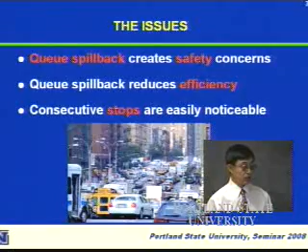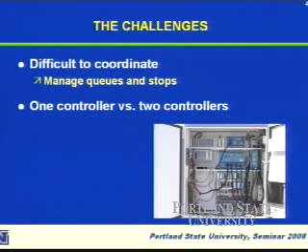Now the challenge to operate and control these signals. One thing is it's difficult to coordinate, because really we need to find ways to manage the queues, how to minimize the stops. And another issue is, we all know typically one controller will provide a much better coordination of two closely spaced signals. But there are some issues related to using one controller.

Okay, one issue, we got a lot of wiring going on. All the signal poles, signal lines, the detectors. There are a lot of wires going into this cabinet where the signal controller is located. Can the cabinet handle all those wires with two signals if we use one controller? And also, where do we find a place to place the cabinet? You need to find a place so that you can at least see both signals at the same time. So these are the challenges we are facing.

And what I'm going to talk about today is actually some special cases of closely spaced signals, where we can have certain kind of strategies to control and operate them. The first one I'm going to talk about is the interchange. And the first type, a common type interchange, is a diamond interchange, where you see the two signals. The two signals, usually, especially in the urban area, are pretty closely spaced.

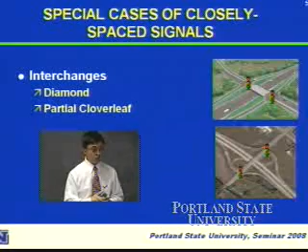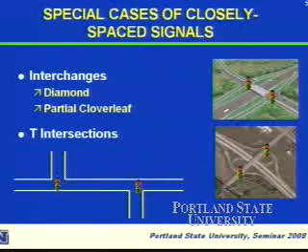And then the other type is like this. We call it the partial cloverleaf. Still, you have two signals on both sides, even though the configuration is a little bit different from the diamond interchange. So a lot of studies have been done related to diamond interchanges, but not so for partial cloverleaf interchanges. The second type, the T intersections. Probably you have seen this type of configuration a lot of places, right? You have two signals and two T-type intersections. They are closely spaced. So these are the things that I'm going to focus on for today.

I know the audience pretty much, the majority are students. So probably you have learned something, just the basics about signal timing. Anyways, I'm not going to get into the details, just quickly go over these things. To do coordination, to operate the signals together, the most important parameters are cycle length, the phase, and the offset. So you have some idea about these terms, or do you? Yeah. Actually, there's a mix of students in here. They're not all civil engineers, so maybe very quickly. Okay, then it will take a long time.

That's good. Cycle is mainly, if you try to coordinate the signals, they must have a common cycle. The cycle is from one movement going through all the other movements, how long it takes, the cycle length. The phase is for a particular movement, how much green time you are going to give to that movement. Then the offset is, when this signal turns green, how many seconds later the other signal will turn green. So just in general.

And then the type of left turn control. Mainly when we deal with the coordination, we are really dealing with left turns. How are we going to deal with the left turns? Are you familiar with the types of left turn controls? Permitted, protected, protected-permitted. Like this. Permitted, right? What does that mean? You can still make the left turn, but you have to watch the opposing traffic. So that's what it means.

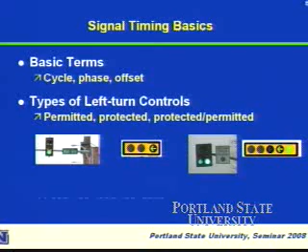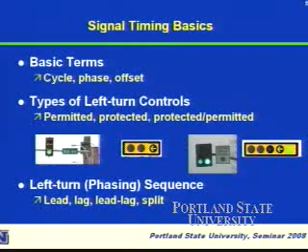But FHWA actually spent several years, close to $1 million, just to standardize the display of a protected-permitted left turn control. So those are the three common types of left turn control. And then the other one is the phasing sequence. Should we run the left turn first, then the through, or the through first and then the left turn? These different phasing sequences are all important for coordinated signals.

And next I'm going to introduce the signal phase. Again, I think you all have some kind of idea, but I still want to go over this material since I'm going to talk about the phases. Signal phases and traffic movements are related, but they are not the same thing. This is a typical full intersection where we have 12 traffic movements.

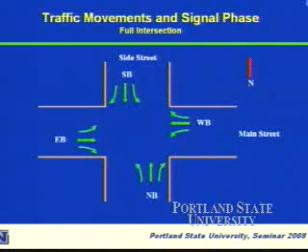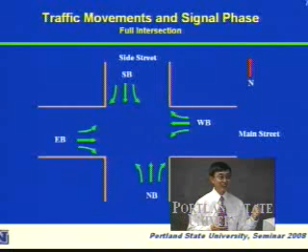But exactly how many signal phases do we need to control a full intersection? Anybody know? It depends. Yeah, the maximum number of phases you will need. Maximum. We have 12 movements. If each movement is protected, we don't want to cause a conflict. The number of phases is actually 8 phases. 8 phases, that's all we need to control a full intersection.

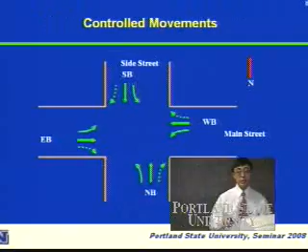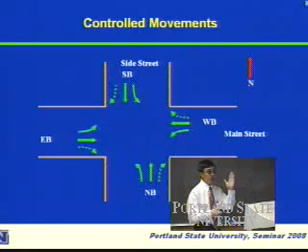Why do we need 8 phases? Because of the right turns. Do we need a separate phase for the right turns? No, because the right turns can just go whenever the through goes. So the right turns can just follow the through. You don't need a separate phase for the right turns. Then we have 8 movements left. And if we want each one of them to be protected, no conflict, then we get 8 phases.

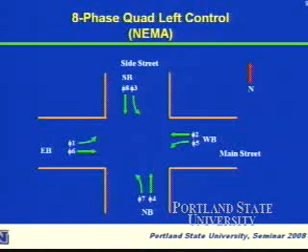And this is the NEMA convention for how to number the phases. As you can see, the even numbers are for through phases, and the odd numbers are for left turn phases. Some phases can move together; some phases conflict with each other. In this case, this left turn can go with this through, no conflict. This left turn can go with that left turn, no conflict. So how can we effectively eliminate the potential conflicts?

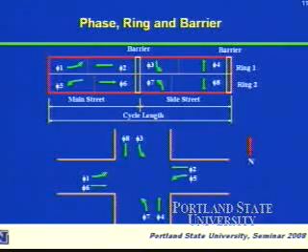The other one I want to mention is called overlap. I mentioned earlier that the right turns don't need a separate phase. But what if we want to provide protection for the right turns so they will not conflict with the others? In that case, we use what's called the overlap phase. Overlap phase means it can go concurrently with at least two other phases. In this case, this right turn can go whenever the through goes.

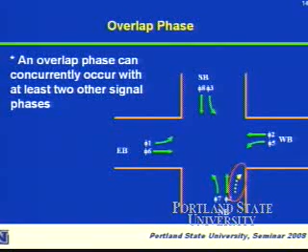What's the other phase it can go with without a conflict? With one and five? With this one? No. With one and five, one in the bottom. If one and five are on, then the right turn can be protected, or will not have a conflict. Okay, you are talking about the 5? Yeah, that's the one.

That's the one. When this 5 has the green, this right turn can have the green, no conflict. But not this left turn. If this left turn goes, that means this 6 can also go, so it's going to cause a conflict.

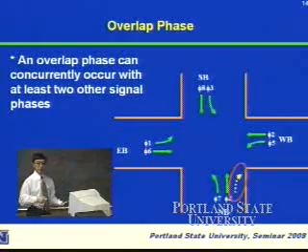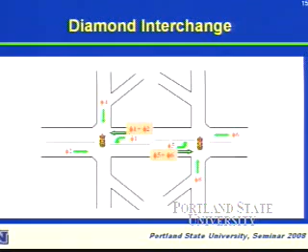Now, you can see how many phases we really need for controlling both signals. 6, right? We have only 6 phases. I mentioned to control a full intersection, we need 8 phases. And that's usually the minimum specification for any signal controller. You must have a minimum of 8 phases. Now, with 6 phases, using one controller, we can control both.

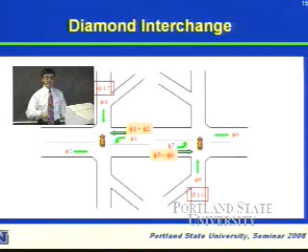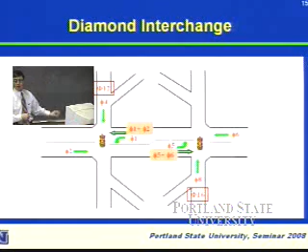Okay. And then there are 2 other phases. We call them the dummy phases. They are used in a special diamond phasing that I'm going to talk to you about next. So they are not really real phases, it's a dummy phase. And some people call them overlap. So overlap is a confusing term, really.

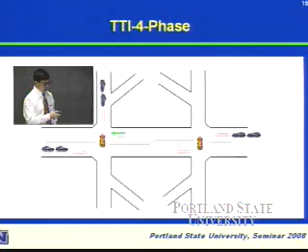This diamond phasing I'm going to show you is called the TTI 4-phase. With this phasing, you can guarantee that no vehicle will stop in the middle. That's really effective when the signals are closely spaced. You don't want people stopping in the middle causing queue blockage.

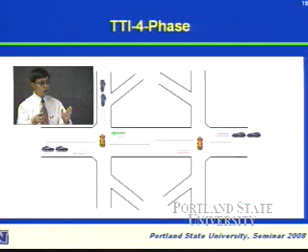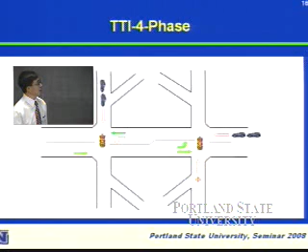Okay, this is how it works. See, I mentioned that dummy phase here. So with this dummy phase, when this is on, you can turn this on, so you can serve both movements. And by the time the car gets here, then you stop that dummy phase. So that's kind of fixed. Then that car will go through without stopping. Now you turn to one side of the frontage road, which is already green, so that movement will not stop. And then the last portion is the dummy phase on this side.

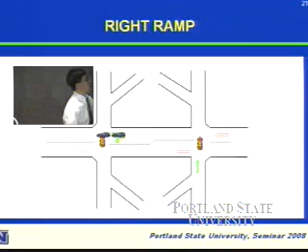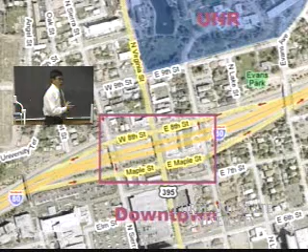You turn the arterial on. The car gets here, that dummy phase turns, so the car will not stop. Then you move to the other approach. So you go like this, clockwise. So no car will stop. So it's really effective for controlling closely spaced signals. And next I'm going to present to you the study we did at these closely spaced signals.

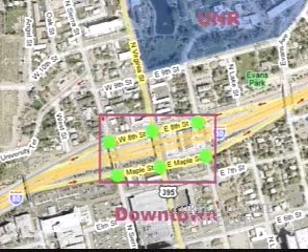Okay, I know some of you may have already seen this part of the presentation, but I never had enough time to tell the whole story. So I'm going to tell you a little bit more about what we did in this project. The UNR campus is here. Reno downtown is here. How many of you have been to Reno? Only 3. Okay. If you come to UNR or go to Reno downtown, you have to go through these signals. The spacing is approximately 300 feet between all the signals.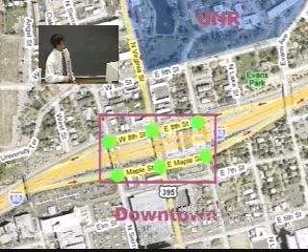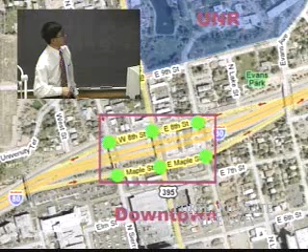And this street is really the freeway off-ramp. They named it 8th Street, and this is Maple Street, which is on the other side of the on-off ramp. This is Virginia Street, the main arterial going through downtown. Then this is Center Street. This is Sierra Street. Okay, 6 closely spaced signals.

Yeah, this is the existing setup, before we did the timing. That's how they control it. You probably don't want to read those phase numbers, but mainly they used 6 controllers, with 1 controller controlling each individual intersection, and those are the phases.

If you look really carefully, for example, Virginia Street, this is a 2-way arterial. We have left turns, internal left turn here, then this is 1-way, this is 1-way. That's a diamond interchange, even though they look like 2 signals, that's really a diamond interchange. I noticed this immediately after I moved to Reno. I said, well, these 2 intersections really need to be improved. So I talked to the city, and that's how we got this project.

But if you look at the other 2 signals on Center Street and Sierra Street, they are not a standard diamond interchange. For example, here, this is a 1-way street going north. Nobody can go south, so there's no through movement here. Because you cannot go through, think about the left turns. Where did they come from? It's mainly from here. It cannot be from the freeway unless you get lost, right? So there's no left turn here. So this is not a diamond.

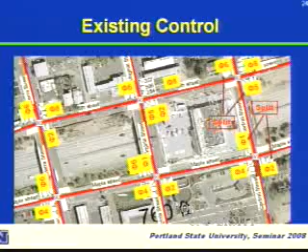On this side, from here is a 1-way. There's nobody going north, so there's no left turn here. Again, this is not a standard diamond. But somehow we apply the diamond phasing to these 2 locations to control all these signals. And this is what we did.

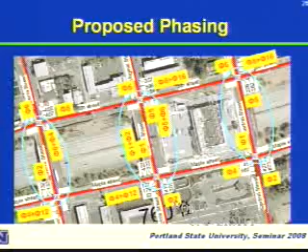We proposed to use 3 controllers to control those paired signals. For Virginia, we know this is a standard diamond, so we use the diamond TTI 4-phase. For Center and Sierra, we use a modified diamond phasing. This is what we proposed. You don't have to read all those phase numbers in detail, but generally we propose using 1 controller to control these 2, 1 controller to control these 2, 1 controller to control these 2. And you can see the dummy phases, phase 16, phase 12, we added there, just to simulate the diamond kind of phasing.

This is looking at Virginia Street, 2 signals, and I told you this is a standard diamond phasing. But this was what's happening before. You can see the queuing stops in the middle. This left turn is a kind of lagging left turn. They got the green. They are waiting for the gap, but they can never find a gap. So they queued up there, blocking the intersection, and those cars got released to the middle, and they also queued up in the middle. That's before. After.

So this is after we put the diamond phasing. As you may notice, when this frontage road, this 1-way street, is moving, we didn't release these cars. If we release them, they are going to stop anyway. So keep them. And by the last portion, with the dummy phase I was talking about, phase 16, now see, it's running phase 16, so you start this. By the time they get there, you stop that movement, and this car will get the green, so they will go.

Okay, they went a little bit too fast, so they had to stop. You should follow the speed limit or go a little bit slower in order to avoid the stop.

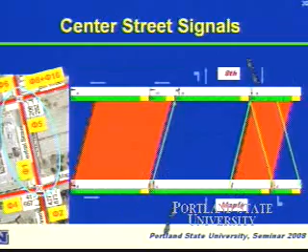Now for the signals on the other two streets. This is looking at Center Street on the right side. I talked about how here is a one-way street. There's only a left turn here. There's no left turn here. So these were the traffic movements, but this is what we proposed. I marked the red portion as when the vehicles stop. In all the green portions the vehicles can go. So the vehicles that will stop are those ones.

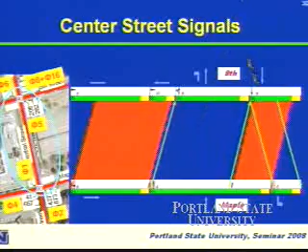Phase 4 here, the people making left and going north, because when they're making left, that frontage movement is moving, so they will stop. It seems like a big red, but if you look at the number of cars, it's only 41 cars in an hour. So it's really not that bad. Then all the other movements pretty much can be progressed. For example, if you're going north, you can go through. You stop only if you arrive at the last portion of the green. If people are coming from the south, yeah, they can go through.

And this is, I shouldn't put the sound. Going north. Okay, going north. You can watch there. By the time they get there, that will turn green. That's kind of a dummy phase I was talking about.

Okay, they go through. You stop only if you arrive at the later portion of the phase. You stop. Like this car, he may stop. And then this will turn yellow, red. Okay, now we know people coming southbound, we already have the green there. So you can see those cars, when they get there, it's the green. Okay, let's get rid of the noise.

That's for Center Street. Sierra, again, we use the diamond phasing strategy to do the Sierra. The only movement that you can see that they are going to stop is actually this movement. This movement from this one-way road, which are mainly the people coming from the east from the freeway, they are going to downtown, making left turn going downtown. If you are in the later portion of the cycle, you are going to stop. Otherwise, all the other movements will go through.

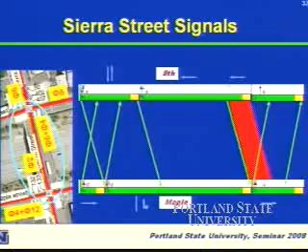Like this one is the people coming from west going north. They are going through. And yeah, they all go through. It's guaranteed. And if you are coming from the freeway here, you can go through unless you arrive at the later portion of the cycle. So that's on Sierra Street.

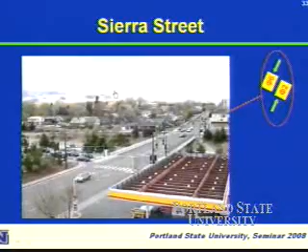Okay. And then this video, what I'm going to show you is actually not what we proposed. Okay, I tell you why it's not what we proposed. Because see, now we start this phase. This is the eastbound. What we propose is actually to hold those cars. Don't release them. If you release them, they are going to stop anyway. But with the current phase, you cannot stop them because there are only two through movements here. If you turn the northbound green, the southbound will be automatically green.

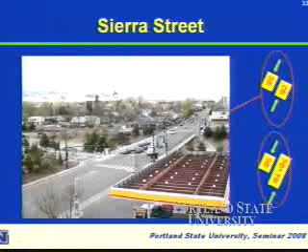What you can do though is, this is what we proposed. Instead of using phase 2, use the overlap to control that movement. Phase 4. So phase 4 cannot go with phase 6 together. So you hold those cars. Somehow I wasn't able to convince the city we can do this, so they were all worried about rewiring the cabinet, those kind of things.

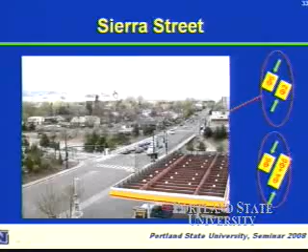Then I thought about it. Okay, maybe I shouldn't really push them. Just leave a problem area so that at least when I teach a class, I can show the students the bad side of the signal timing. So I didn't push that hard. But recently we got complaints. Some people say, I always stop in the next signal. Yeah, and maybe we have to do something. So that's Sierra.

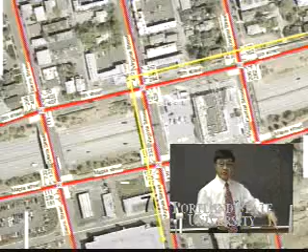I just talked about using 3 individual controllers to control those paired signals. Then the next one is how can we come up with the timing so that we can progress the majority of the heavy major movements. So this is what we did. Look at the major movements. This is one of them. People coming from east on I-80 freeway going downtown using Virginia. That's about 284 cars per hour. That's a pretty major movement.

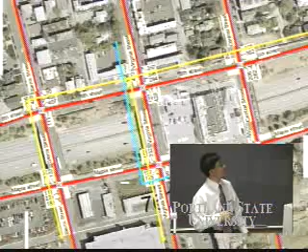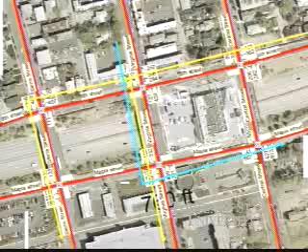The other movement, people using Sierra going to downtown. That's about 400 vehicles per hour, major one. The other one is people coming from Virginia, which is usually people who work for the university and then go back home using the freeway. That's about 300. So we try to progress those major movements. Of course, we cannot take care of everybody. So some movements have to suffer. That's just the nature of signal coordination. We try to take care of the major movements.

Okay, so you can see here, I'm looking at the 8th Street. Okay, I don't know why it is. Oh, what happened? Okay, I'm looking at the 8th Street, how the traffic will go to the next signal and then make a left turn on Sierra and then go to downtown. So they should be progressed without stop.

Yeah, I couldn't see the other signal at the first signal because I was standing on the parking garage. So I couldn't really track the entire movement. Yeah, I wish I had a helicopter flying over. I can see everybody. But that's the movement. It's progressed, guaranteed, no stop.

Then look at the Virginia Street. Okay, this is Virginia going south and turn left, going to freeway. Again, I can only track. This one I was actually able to track the entire movement.

They come to this signal. Yeah, they do stop shortly. This is kind of for efficiency. Yeah, I don't want to talk too much. Once they make the left turn here, you go to the next signal, should be green, should be already green. So they can be progressed without stopping. So these are the major movements I talked about earlier. Take care of the major movements. Okay, so they go through, no stop.

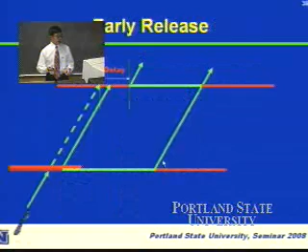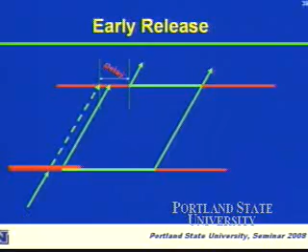All right. The next one, again, is related to whether it should run actuated or fixed time. This is a kind of illustration of a case. Where? I went too fast. This is the time we allocated to the cross street. If we run actuated, when there's no car on the cross street, that phase will terminate.

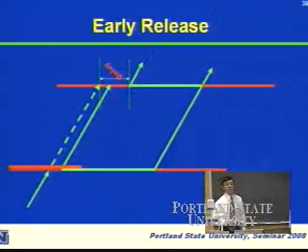That will result in a car going like this. You get to the intersection, you stop shortly, that cross street phase terminates, and then you move on again. You get to the next one, you stop, and then go through. So the delay, that's the amount of delay, right? The delay is between the ideal travel time and the actual travel time. How many stops? 2 stops.

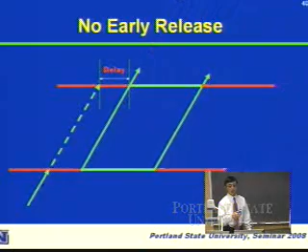How about if we do this? Even if there's no car, I will keep that phase on. So hold this vehicle. Make 1 stop, then you hold it. Then you release it. Then you can go through the next one without having to stop. What's the delay? The same, right? The same amount of delay, but 1 fewer stop.

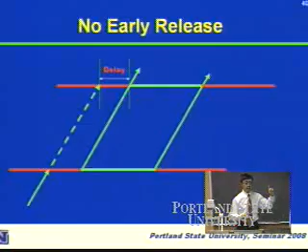But how about if we hold it? This is no early release. See, there's no car here, but don't terminate that phase. Hold the cross street. And when you release it, make sure they can go through the next one without stopping. So you do delay a little bit longer here, but once it's released, you go, and the next one will turn green. So you can progress.

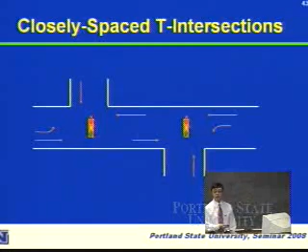Okay, so this is a case about applying diamond phasing to an actual case. I also mentioned the other type is T intersections and partial cloverleaf interchanges. Like in this case, how many phases do we really need? Can we use one controller to control both signals? If we really look at this, these are the phases we really need, 6 phases. And we can use overlap to control those 2 movements. So one controller is enough to control both. But how many engineers really know that? Not many. You will see a lot of people don't know that.

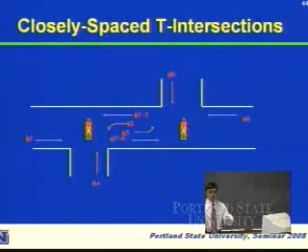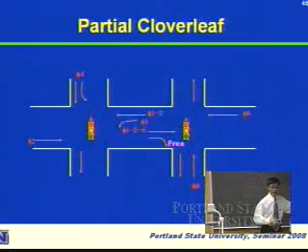How about this? You have also seen this kind of T intersection. Again, one controller, you can do that. How about this? Similar. But this one, I call that partial cloverleaf. It's mainly one side you have the internal left turn, the other side, instead of left turn, they make a free loop right turn. How can we use one controller to control this kind of interchange? Again, not many people realize they can do this. This is my suggestion. Of course, I cannot go through the details.

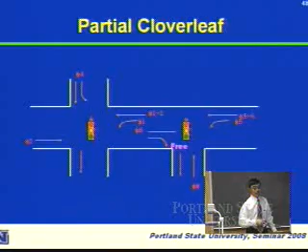Just to give you some final thoughts based on the things I presented. The first one I already talked about. Diamond phasing we have studied for a long time, but still a lot of traffic engineers are not aware of this kind of phasing, and they don't know how to apply it to similar cases. The other thing is if the signals are closely spaced, usually the stops and the queuing are more critical than delay or travel time. When you evaluate the performance of a signal system, you usually do the travel time run. But when the signals are close, stops and queuing are more critical.

And also in terms of using one controller versus two controllers to control closely spaced intersections, this is an area that actually needs more research. I have been thinking about this topic, but I haven't been able to get funding to do that. So that's an area that needs research.

Our project did get a lot of exposure in the local media. Do you want me to show this, or have you seen this video? About 2 minutes? Okay. Some of you may have seen this if you visit my website. This is a local TV report about the project we did.